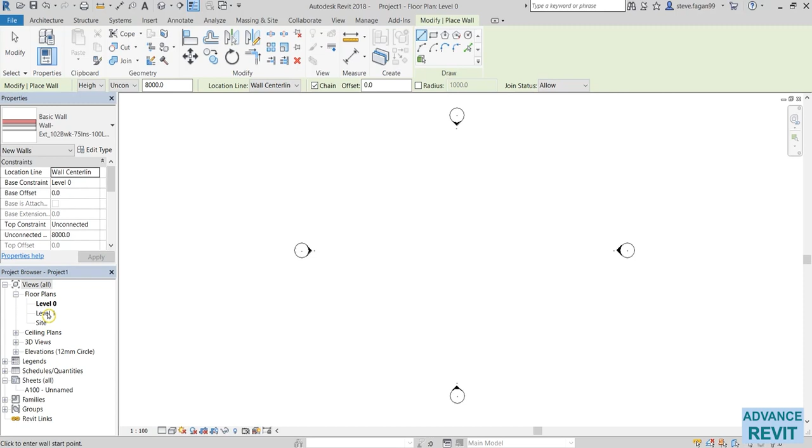So to get a good view of what I'm about to do, I'm going to open up an elevation view. In the project browser we have our elevations heading. If we click on the expansion button there, we have our east elevation. So if we double click on that, that opens up our east elevation.

Here we have our level 0, which we see in our floor plans, and our level 1, again, it's in our floor plans in the project browser.

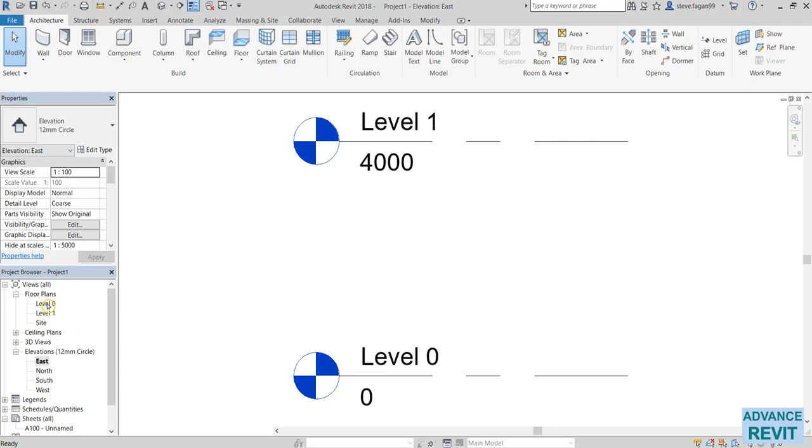So if we go back to our level 0, I would like to have both of those views open at the same time. So in order to do that, I'm going to type in WT, which stands for window tile, and by doing that it's going to open up both views on the screen.

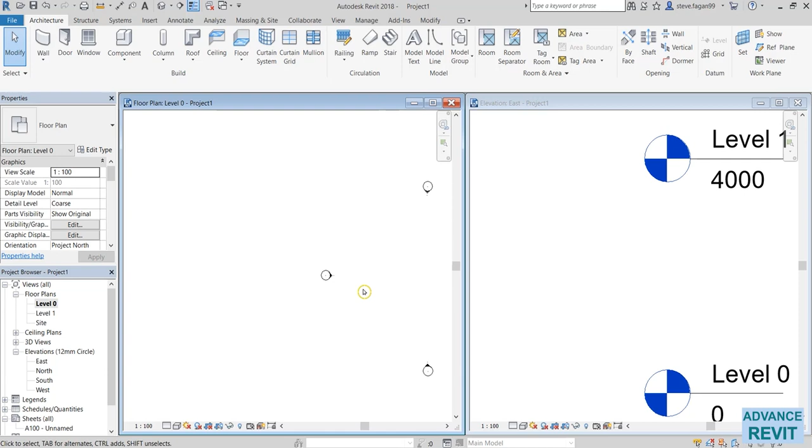Here on the left hand side we have our floor plan level 0, and on the right hand side we have our east elevation. Making sure that our level 0 is active by simply clicking on the tile, we will now go back to the wall tool. I'm going to be using my draw by line from the draw panel, and now getting onto the options bar.

So the first option here says height. It may say depth on yours, but if I hit the drop down arrow we can go between the two.

So whether we draw by height or by depth simply means that as we're drawing currently on level 0 - there's our level 0 - if I have height selected, my base level will be constrained to level 0, so my wall will go above level 0 and connect to level 1. If I change over to depth, my wall will be constrained at level 0 and go below my level 0. So that's the difference between the height and the depth.

Next, once we've specified that, we're going to use height. We'll then select the next option, which is where we want to constrain it to. So we're currently on level 0, so our next level is level 1. So if we constrain it to level 1 and draw our wall.

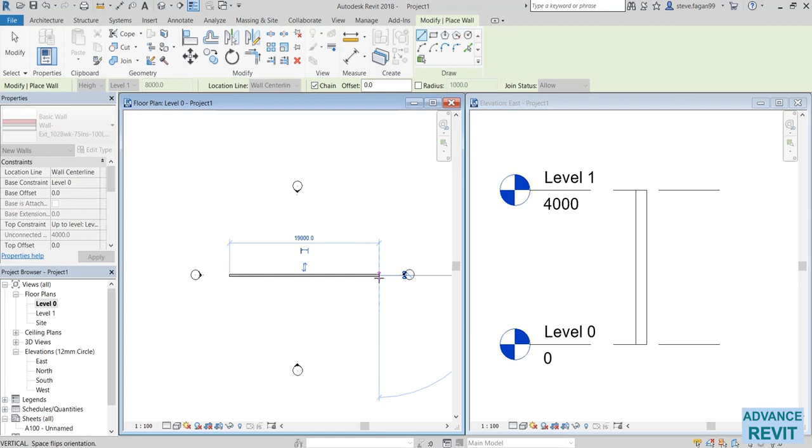There you'll see on the right hand side in our east elevation, our wall's base constraint is level 0 and its top constraint is level 1. When we constrain this wall, if I go to my east elevation and select my level, and if I change the level, the wall, because it's been constrained to that level, it will move with the level.

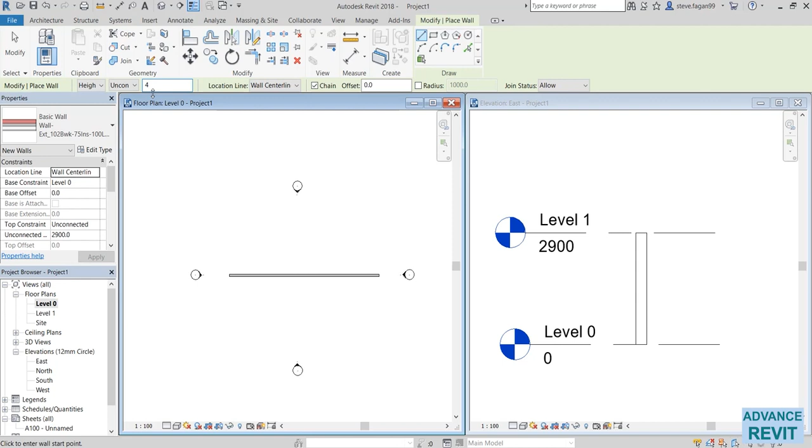If I select unconnected, I'm then able to specify a height. So if I give this a height of 4000, draw my wall, you'll notice then on the east elevation that there's my wall, base constraint level 0, unconnected with a height of 4000.

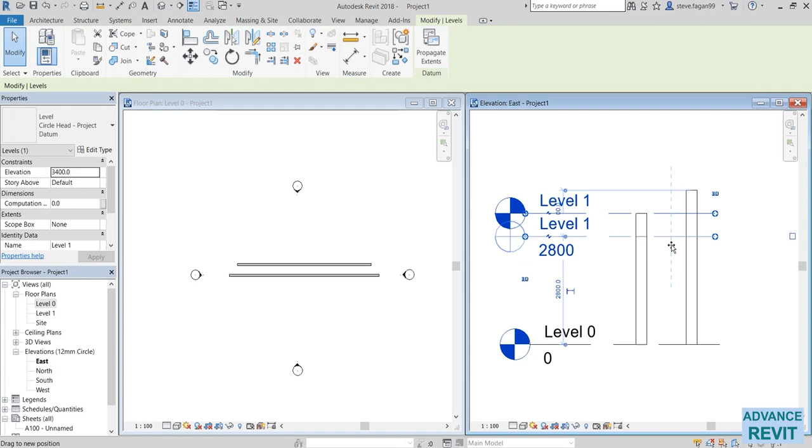So if I change my first floor level, because the wall is not constrained to that level, the height doesn't change. So now we just want to have our level 0 open. So if we double tap on the top of the window tile, it'll bring us back into our level 0.

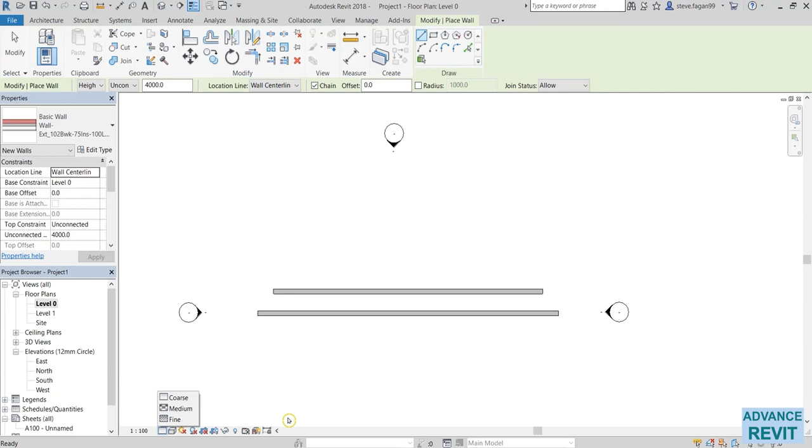For the next option, which is the location line, I'm going to change my detail level to medium. So come down here to the view controls and select medium. So our next option is the location line. If we hit the drop down arrow, you can see we have 6 different options.

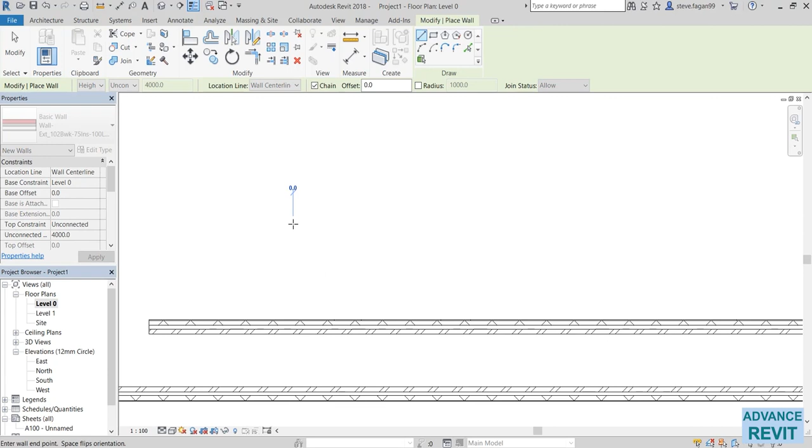With the first, which is the wall center line, I'm going to zoom in using my scroll wheel. When I click to start and move my cursor in the direction I want to draw my wall, you'll notice in the center there's a dashed light blue line. That is my location line. And as it's set to wall center line, you'll notice it's at the center point of that wall.

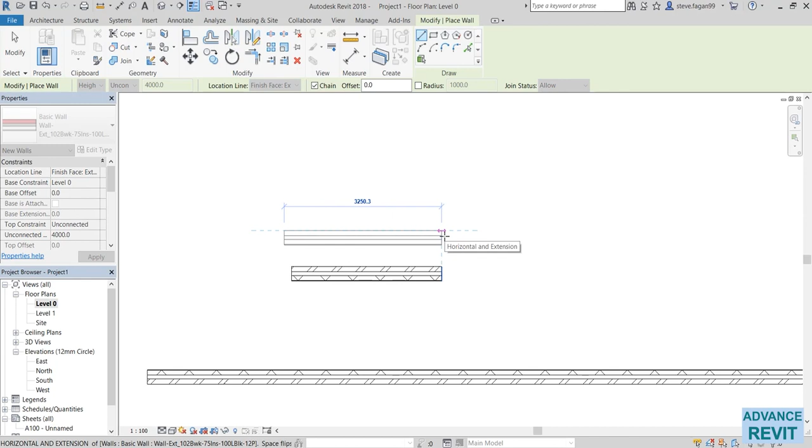It's also represented by the blue grips either side. So if I change it to finish face exterior, when I draw my wall, the dashed blue line is on the outer face of my wall, again represented by the blue grips either side.

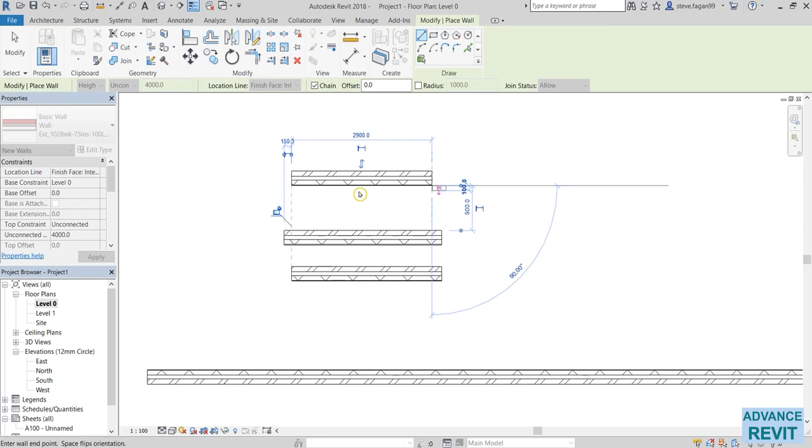As well, we have finish face interior. So there's our dashed blue line on the inner face, running along the plasterboard of the wall, again with blue grips either side.

The other options which we have are core centerline, core face exterior, and core face interior. What they're referring to as the core is when we create a wall, we must specify what the core of that wall is. The core is generally the structural part of your component, so the blockwork here would be the core of our wall.

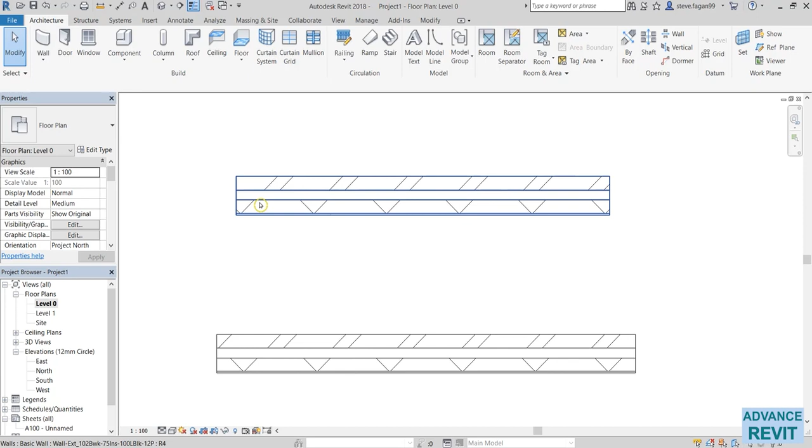To show you how that's represented, I'm going to select it, go to Edit Type, edit the structure, and show preview. Don't worry about what I've just done - we'll go into a lot more detail about this in a later video. For now, I'm just going to show you this as a small preview so you have a better understanding about what a core boundary is.

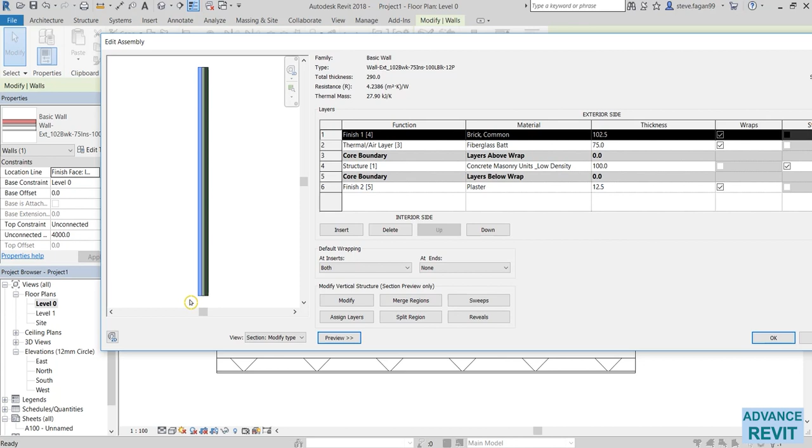So here is a section view of the wall which has been created. There's our brickwork, represented here. Next is the insulation, then our concrete block, and our plasterboard finish. You'll notice on either side of our concrete block, we have our core boundaries.

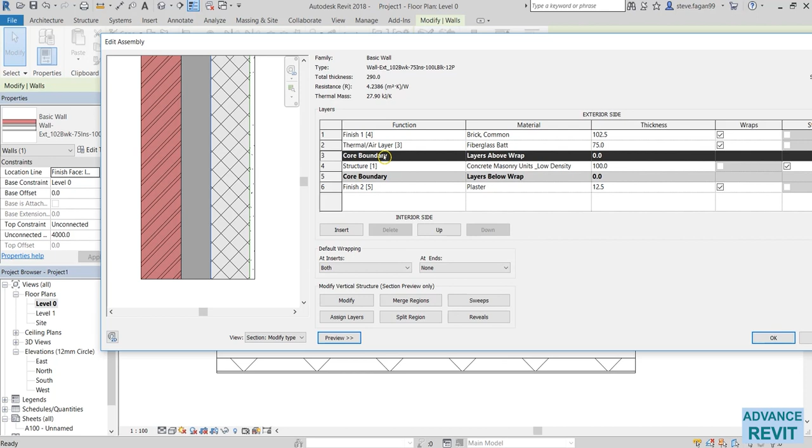So this here is our exterior core boundary, this blue line here, and here's our internal core boundary, which is this blue line here. So the purpose of creating the core boundaries...

is when we have two intersecting walls, you'll notice that the blockwork joins together, ignoring the brickwork. So the blockwork will cut right through the brick as well as the insulation. All components have been created in this manner.

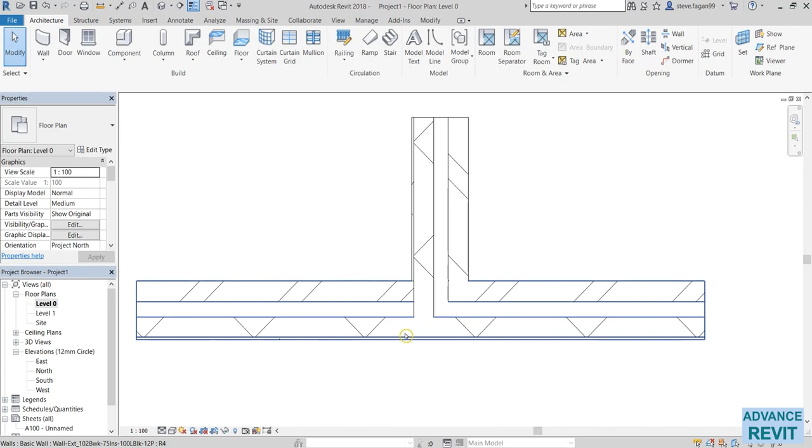So when we go to draw a wall and we change our location line to the core center line, when I place my wall, you'll notice that the dashed blue line is in the center point of that blockwork, in between those two core points.

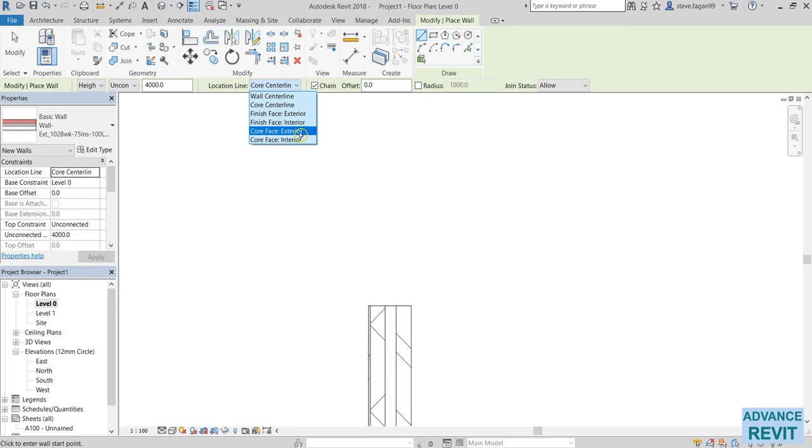And we have core face exterior again. When I draw the wall, you notice my location line is on the external face of the blockwork. And we have the internal face of the blockwork.

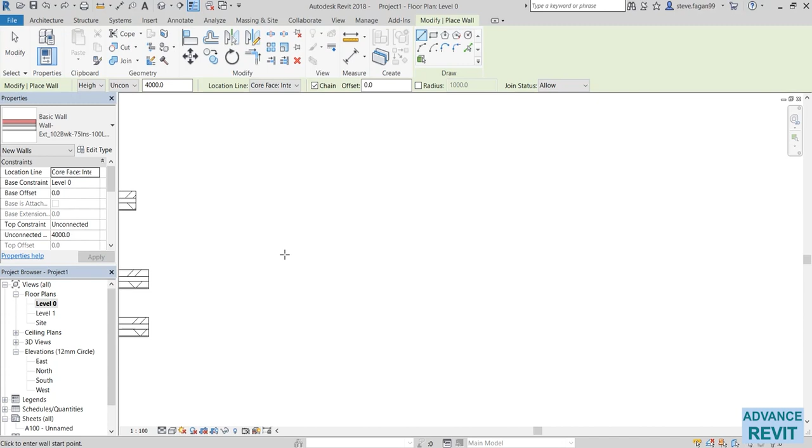Our next option is chain. When we draw by line, having the chain feature turned on, when we click our start point and then our finish point, we'll automatically start a new line segment - this is known as a chain. If I turn chain off, when I draw a line segment, that is a singular line segment and it will not continue as a chain.

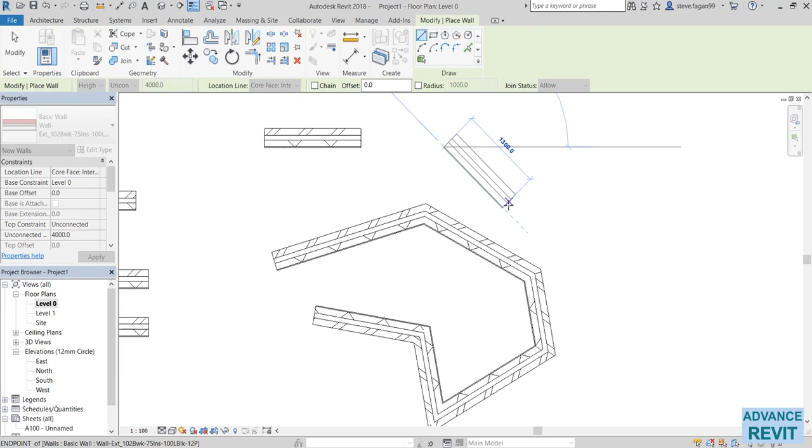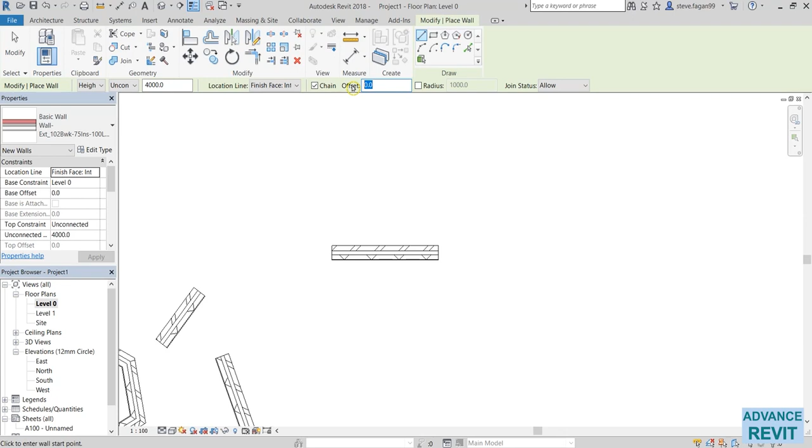Next option is the offset. I'm going to change my location line to finish face interior, so when I draw my wall, that dashed blue line is on the face of the plasterboard. When I attach an offset, I'll change my offset to 1000. Then when I draw my wall, there's my dashed blue line, which would be on the face of the plasterboard, and my wall is now offset up by 1000.

If the wall is in the incorrect location and you wanted to flip it to the other side of the location line, press the space bar to flip the wall to the other side of the location line.

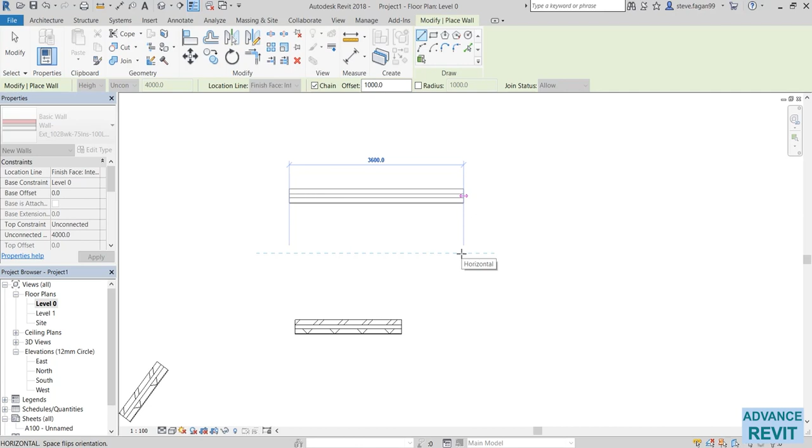Next is the radius. So when it's turned on, we have a radius specified. When we draw two intersecting walls, it will generate a radius between those two intersecting walls.

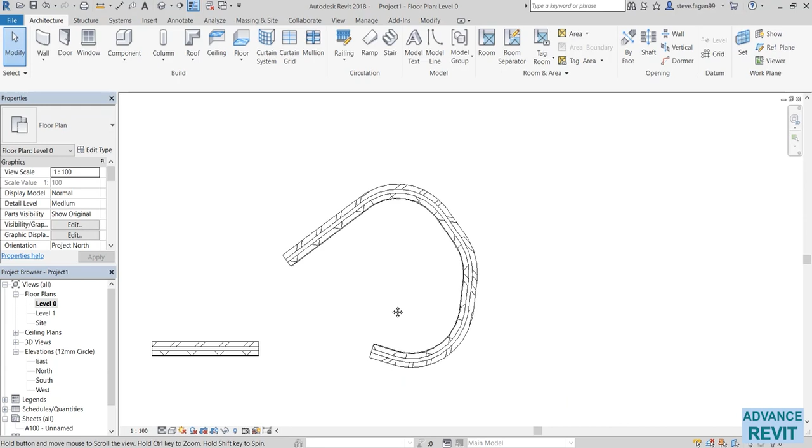And lastly is join status. So when we draw two intersecting walls, they'll automatically join and the core boundaries will meet.

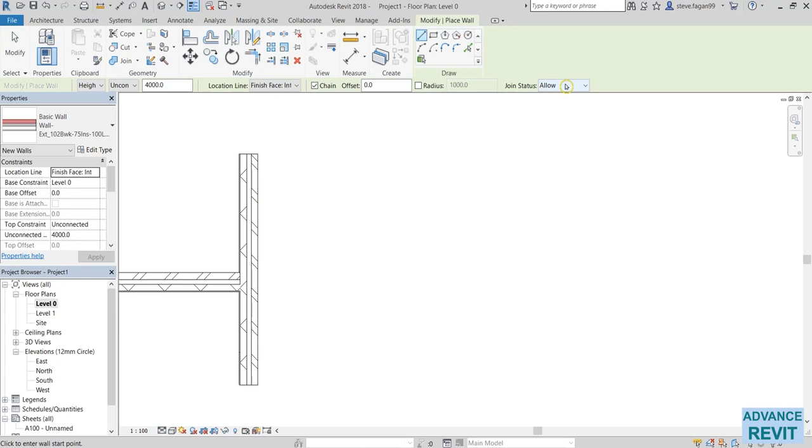If we have join status on disallow, when we do the same, the walls do not join, so the core boundaries do not meet.

If you wanted the walls to join, simply select the wall and you'll notice this symbol here - that symbol is your join symbol. So once you click on that, the walls will then join together.